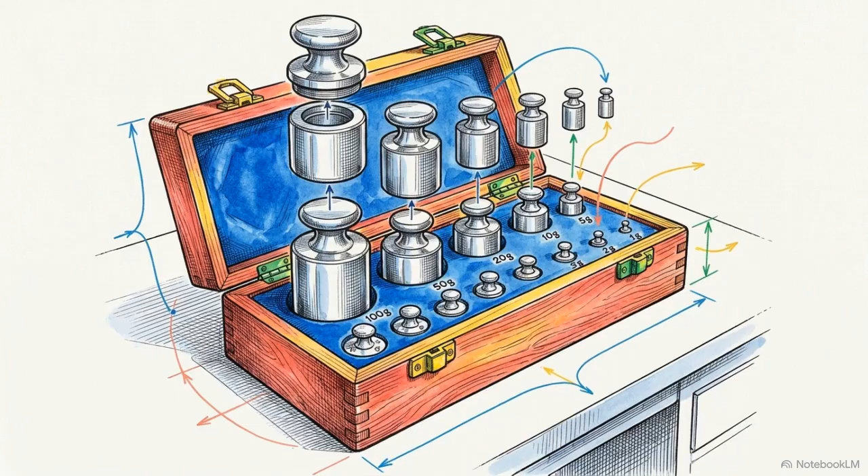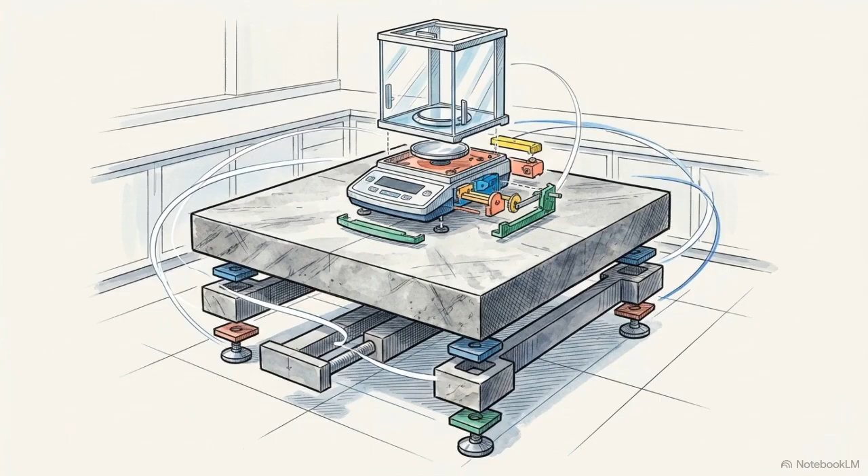You will also need clean handling tools, like forceps or non-reactive gloves, to protect the weights from contamination. Next, check your environment. The balance must sit on a stable, vibration-free surface. Verify that the ambient temperature and humidity in the room are stable, typically maintaining within 1 degree Celsius per hour.

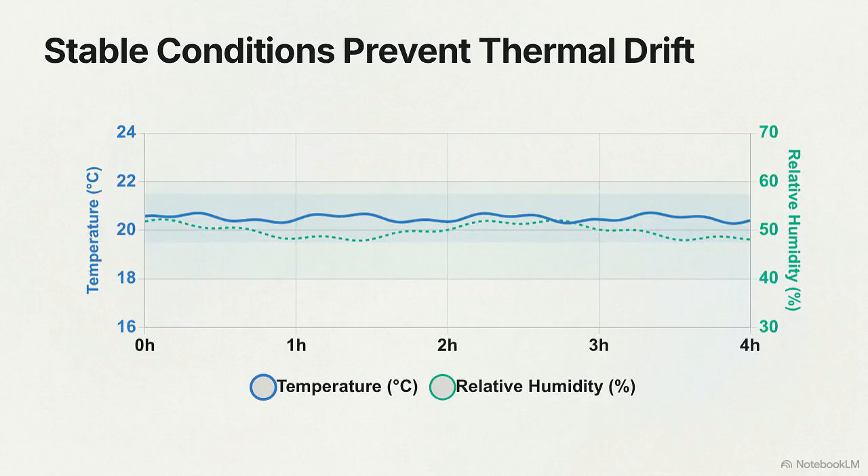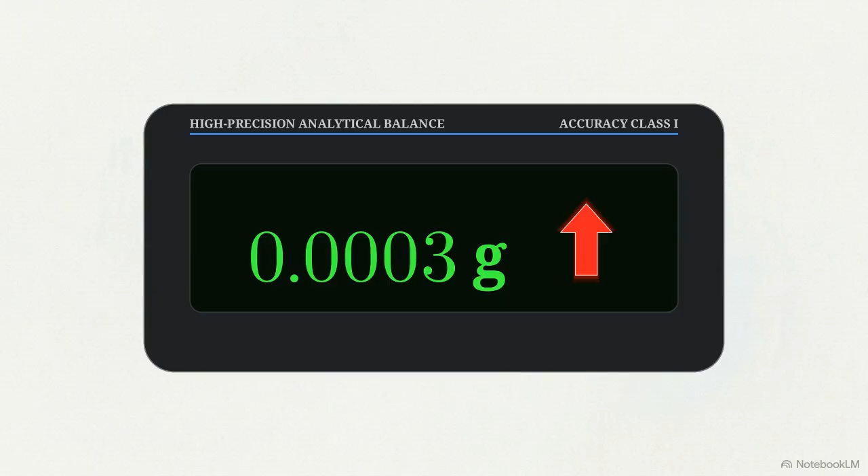Finally, confirm the balance has been powered on for the manufacturer's recommended warm-up period. For analytical balances, this stabilization phase usually takes between 2 and 4 hours. Skipping these preparation steps introduces invisible errors into the system, primarily thermal drift. This will cause your calibration to fail before you even take your first measurement.

Step 1 is recording our baseline. Ensure the weighing pan is empty, close the draft shield, and verify the as-found 0 reading.

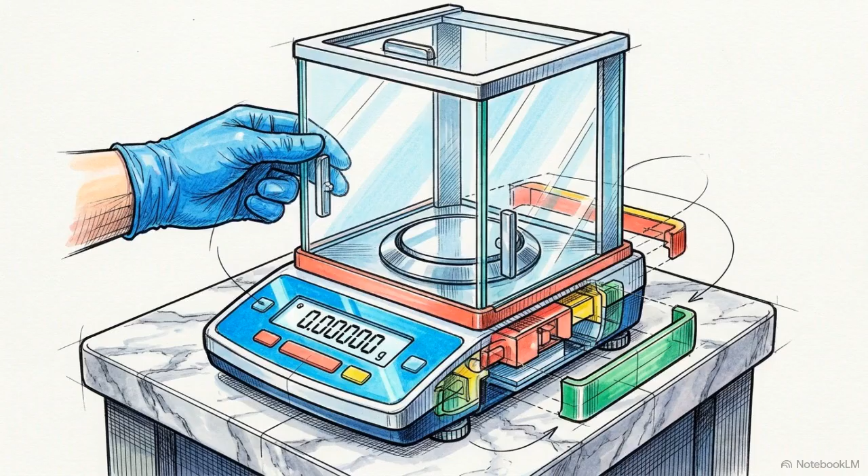We then move to the repeatability test. This step determines how consistently the balance measures the exact same mass over multiple cycles under identical conditions. Select a single test weight that is close to the maximum capacity of your balance.

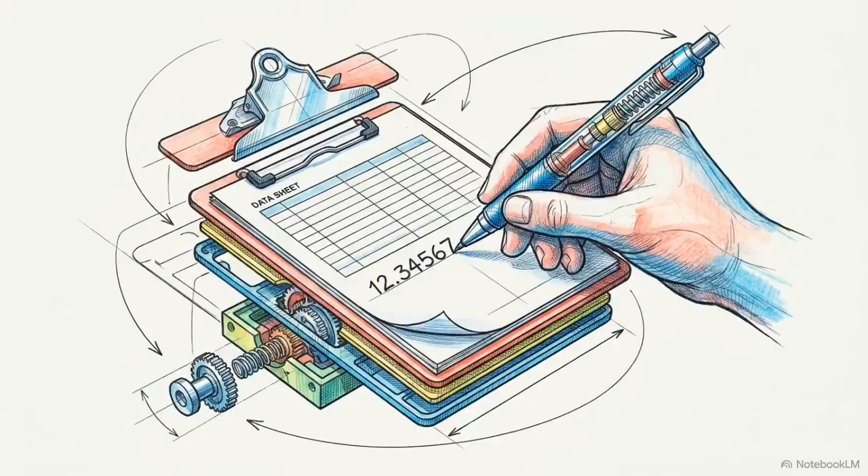Apply the weight, wait for the reading to stabilize, record the exact value, and remove the weight. You must repeat this cycle exactly 10 times. Once you have your 10 recorded values, calculate the standard deviation for the dataset.

If the standard deviation is high, it points to underlying mechanical or environmental instability. Even if a reading occasionally hits the correct mass, the instrument cannot be trusted for precision work.

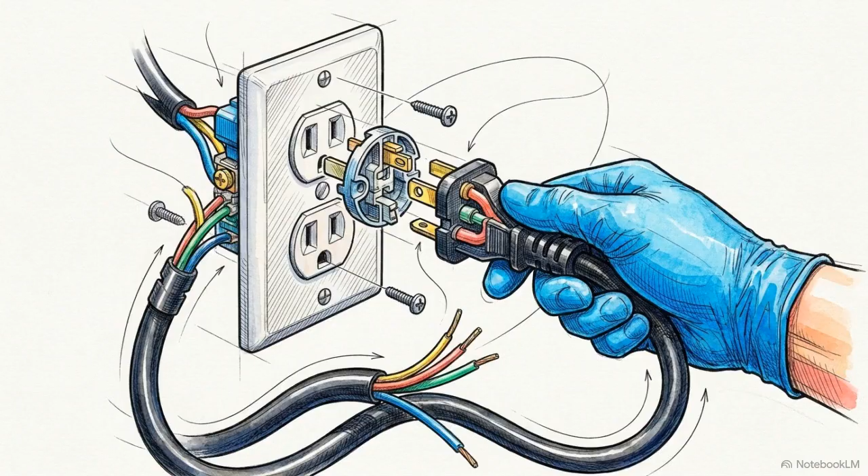Next is the eccentricity test, often called the corner load test. We use this to detect any non-linearity in the load cell when an object is placed off-center.

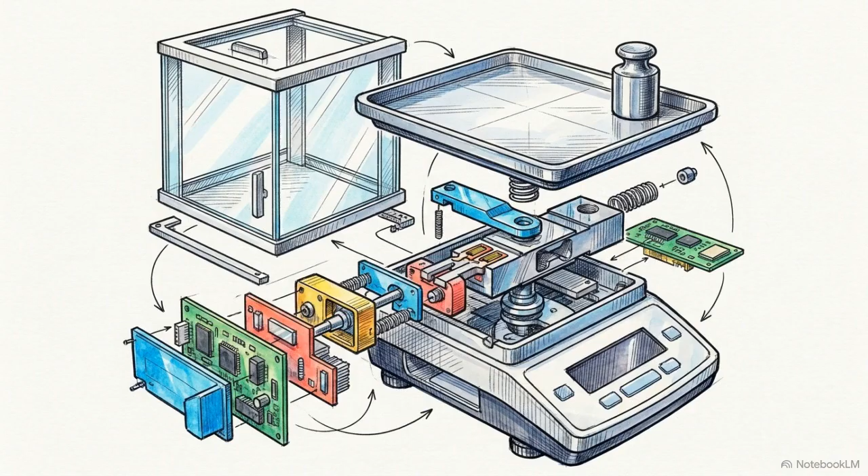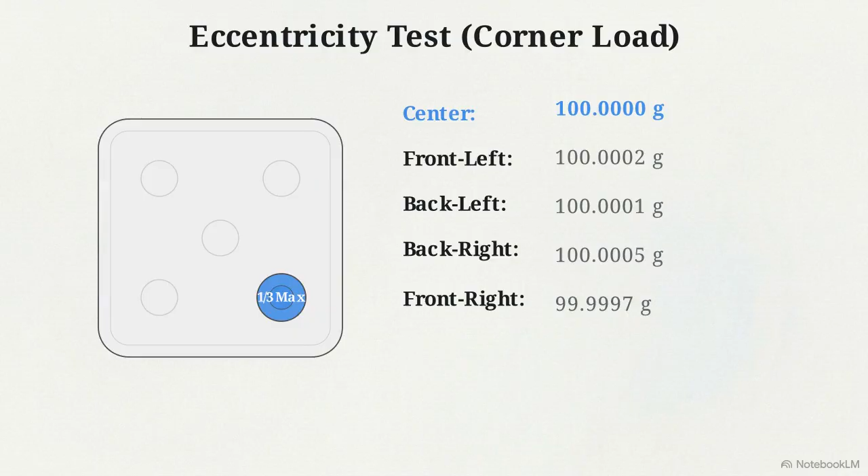Select a weight approximately 1/3 of maximum capacity. Place the weight exactly in the center and record the reading. Then move it to the front left, back left, back right, and front right, recording the indication at every point. To find your eccentricity error, calculate the maximum difference between your center reading and any of those 4 corner readings.

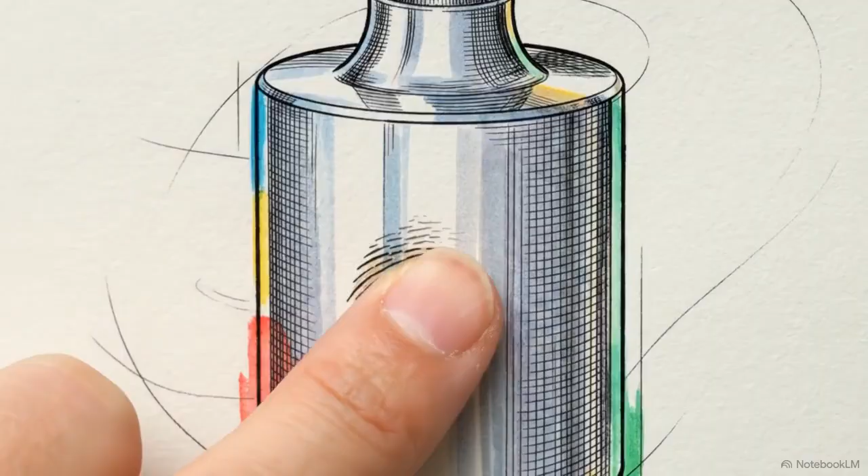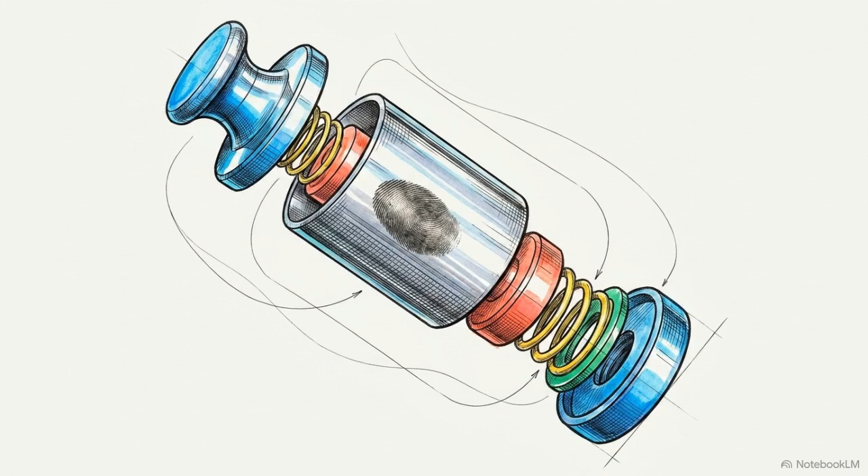As a firm warning, throughout this process, you must never touch the reference weights with your bare hands. Skipping the corner checks means you will miss mechanical leveling faults, and transferring skin oils onto the weights alters their mass far beyond Class E2 tolerances, immediately invalidating all of your calibration data.

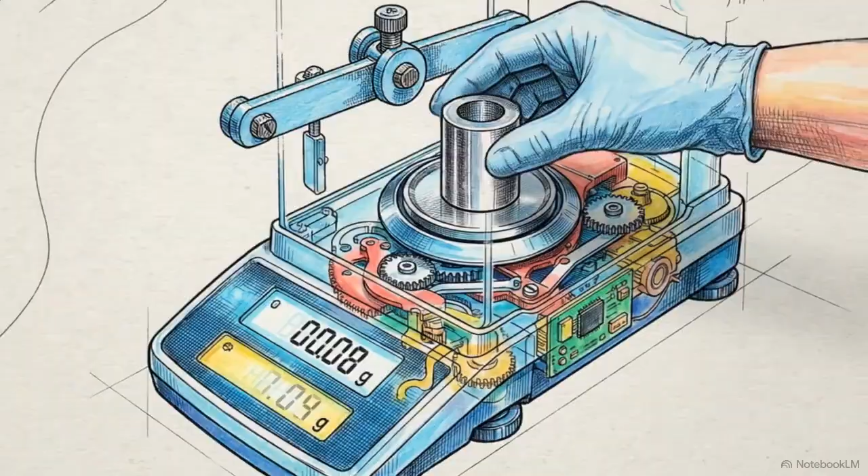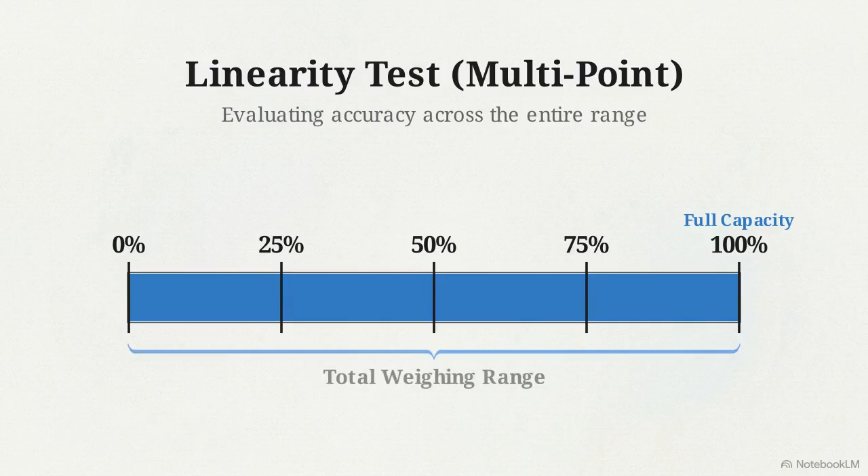Now we run the linearity test. This appraises the balance's accuracy across its entire operational weighing range, rather than at just one isolated capacity. We test at a minimum of 5 specific points: 0, 25%, 50%, 75%, and 100% of the instrument's total capacity.

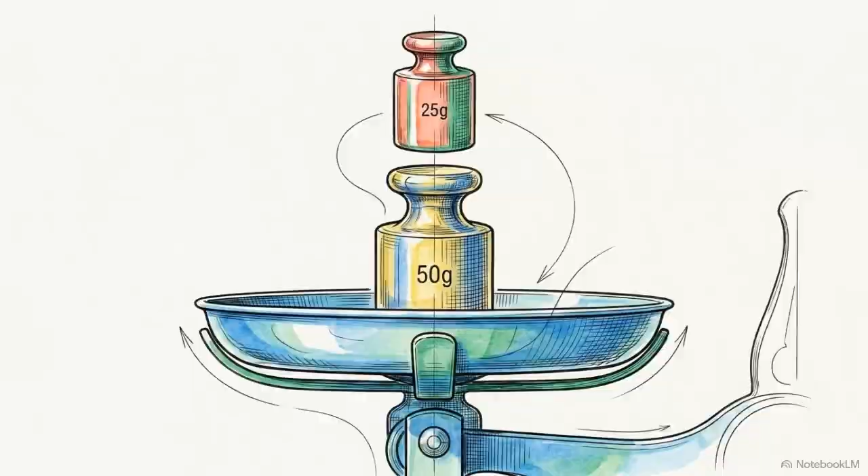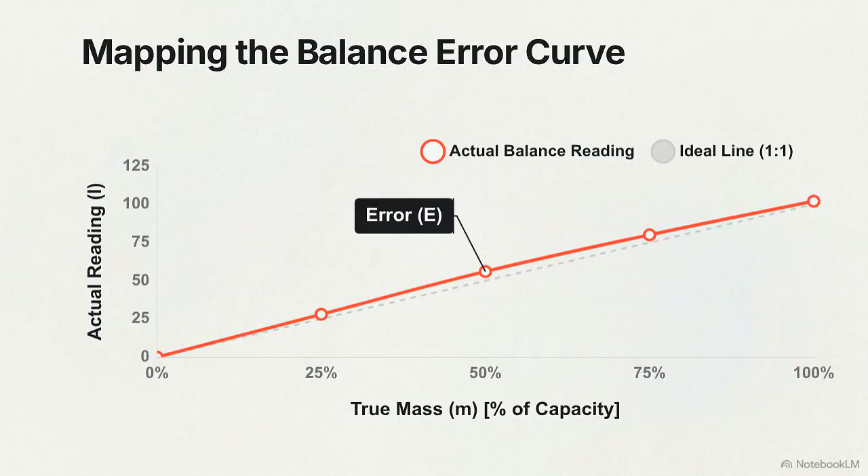Verifying linearity proves that the instrument scales its measurements accurately. This ensures a 10-gram sample is measured with the same relative precision as a 100-gram sample.

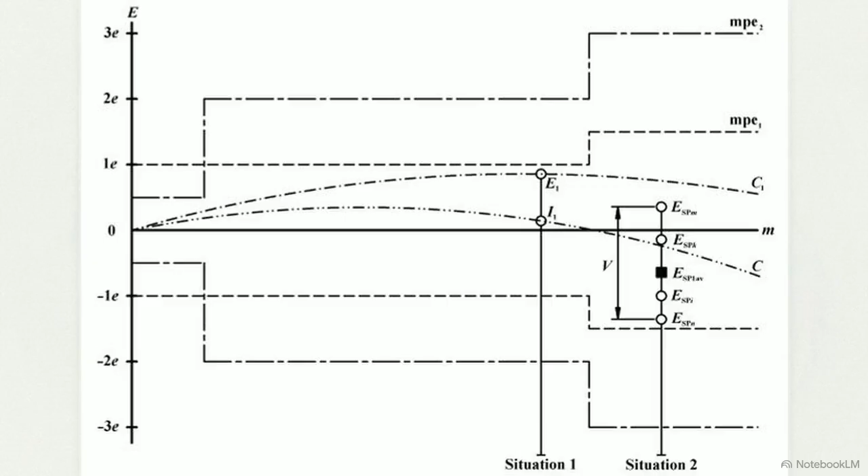To evaluate that data, we use the maximum permissible error, or MPE. This is the strict regulatory limit of allowable deviation for your instrument's specific accuracy class. You take the calculated errors from your repeatability, eccentricity, and linearity tests, comparing them directly against these boundaries.

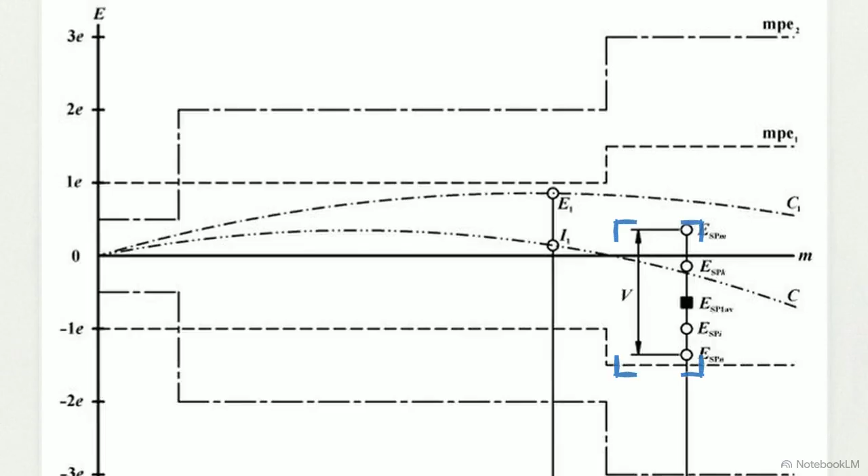The final rule is absolute. Every recorded error must fall safely inside the MPE boundaries to pass. By strictly following this procedure and verifying your data against the MPE limits, you guarantee a fully traceable and legally sound metrological calibration.